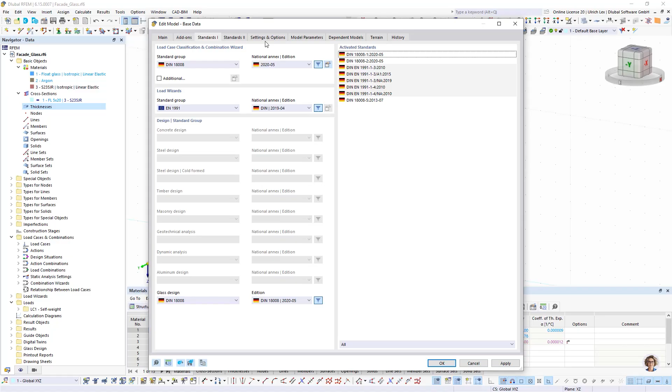So on this point, we can switch to RFEM and start with some modeling. First, I want to take a look at the base data. For today's webinar, I have activated the add-ons construction stage analysis and glass design. As standard, I've chosen DIN 18008, and as a last part, I made some small changes — when you work with a small radius, it could be necessary to modify your tolerances a little bit. I changed it from 0.5 millimeters to 0.1 millimeter. That is all I changed, so I can continue with OK.

Let us start with some modeling. For the basic structure, I want to create a plane surface with dimensions of 0.9 meters for the width and 1.8 meters for the height. For this, I first create a new thickness, and for the new thickness I can choose my thickness type: glass composition.

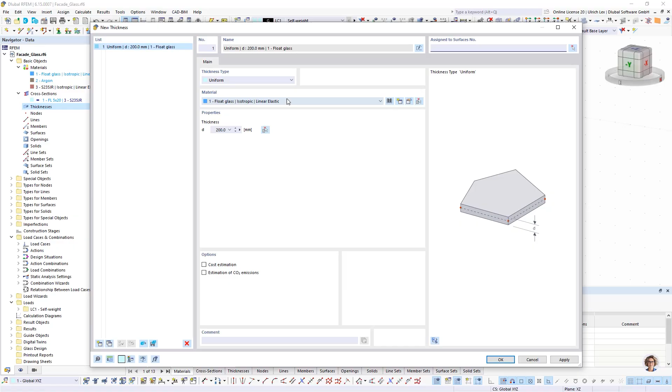Here I can easily define my different layers. I want to use a float glass with a thickness of 4 millimeters, then an air gap with a thickness of 16 millimeters, and as a second part, a float glass with 4 millimeters. This should be today my composition for an insulating glass.

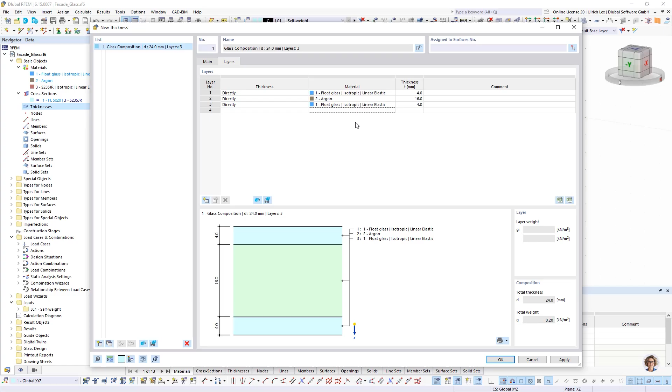But it would be possible to create a different one, just as you want — you can also create your own compositions. You can save your compositions here as a template, or read in templates directly with a composition you created before. Here, only laminated glass or a triple insulated glass would also be possible.

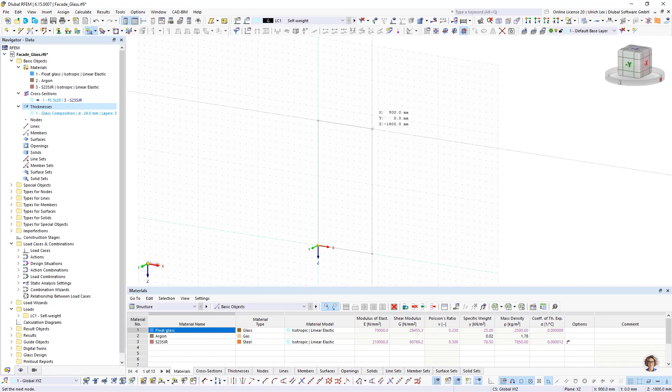Once you've created your composition, we can continue with OK. As a next step, we can create our surface. We use our glass composition as the thickness, continue with OK, and create our surface at 1.8 by 0.9 meters. So now we have created the surface.

At the bottom part, I want to divide my lines by distance, maybe starting at 100 millimeters. I don't want to divide it directly — today I want to use the node on line option, where the line is not divided.

Okay, and a second time with this I have the possibility to assign here nodal supports, maybe for the self weight.

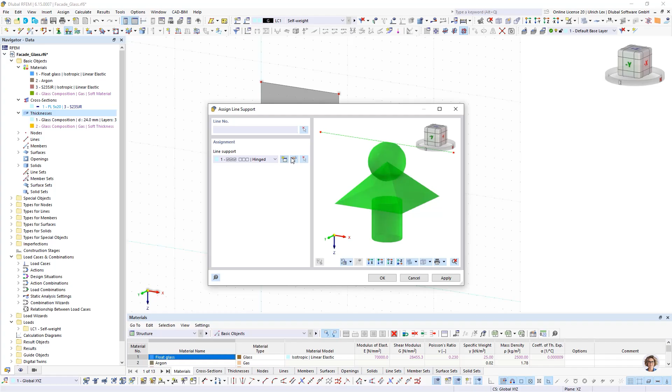As a next step, I want to take a look at the supports. Here I can use maybe line supports, create here a new line support, and say it's in global Y direction supported.

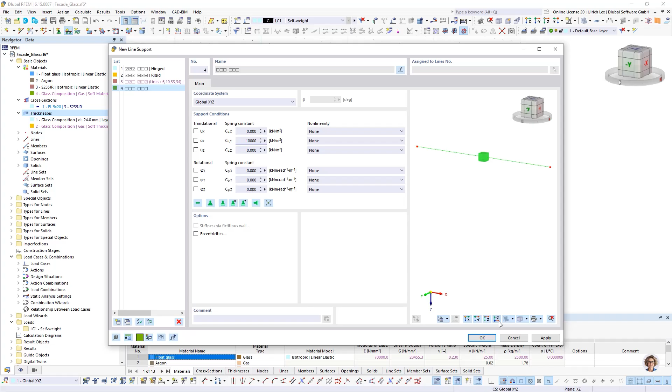Here I can also use a spring constant. It's maybe helpful for the glass, for the peak stresses in the glass. I use now a high spring constant and want to support my lines outside.

And for the self weight, I create nodal supports. One which is supported in X and Z direction, and the other which is only supported in Z direction.

So when we have done the settings, then we can go to the glass design, and here to the glass composition model. This glass composition model is created automatically. It's now red marked because the lines are not so oriented how it is needed for the glass model. That's why I open with double click.

Here I want to choose a solid model because of the insulating glass. It's only possible the solid model. I have here my layers, what I have assigned. I have here my reference plane where it is created. Here I can define my supports where they are located directly.

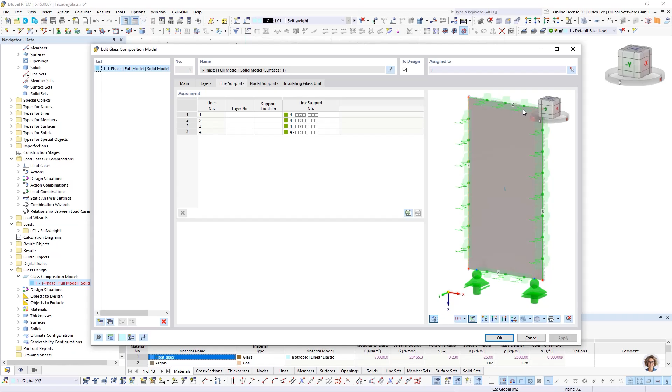Maybe here I can choose on layer 1 and 3, and in the middle 1 and 3, in the middle 1 and 3, and 1 and 3 in the middle. What does this mean? This means I have here my insulated glass structure, and the supports are created on this place or this place.

When I say it's only on layer 1, then only one side is supported, and the same is when I say it's on the top, then on this location it's created.

The same I want to do for the nodal supports. Here I support each glass surface and the middle.

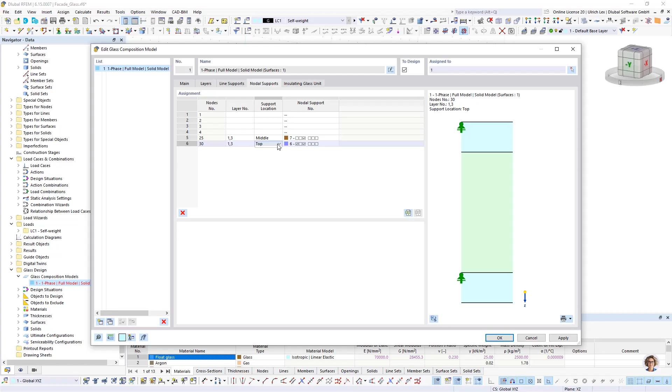For the insulating glass, I have only the setting for the spacer. Today I want to activate a user-defined spacer. Here I have to create a thickness for the side wall. I create a new thickness. I copy this glass composition, a new thickness, and use here maybe

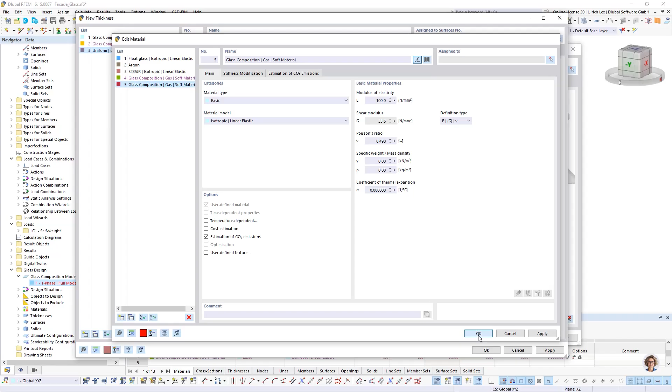a small e-module with a small shear module, and the thickness maybe 5 millimeters, and can then continue with apply.

Here I get my message that some lines are not oriented in the direction where I need it. That's why I can set the required rotation and continue with OK. Now it's not anymore red marked because my lines of the system are rotated.

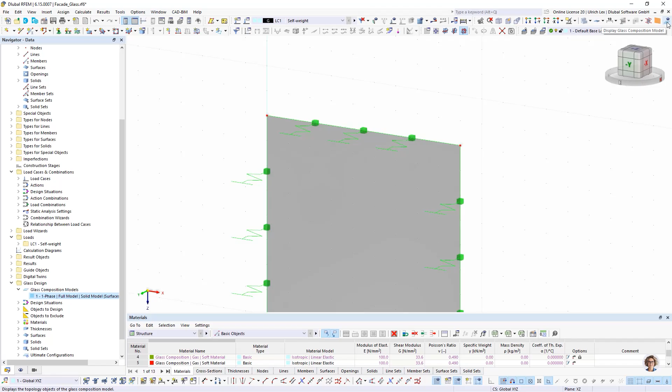So what is happening in the background? Solid sets, I do not need to see it. What is happening in the background? We can switch on the glass composition model, and here we see that my insulating composition is created.

I have on the one side my first glass thickness. It's created with 2 solids. I have my space, my air area, and on the second side my glass panel.

The supports are created also in the middle as we defined it, and downside we have here our nodal supports. So here's okay.

And now we are ready with our basic construction, what we have to define.

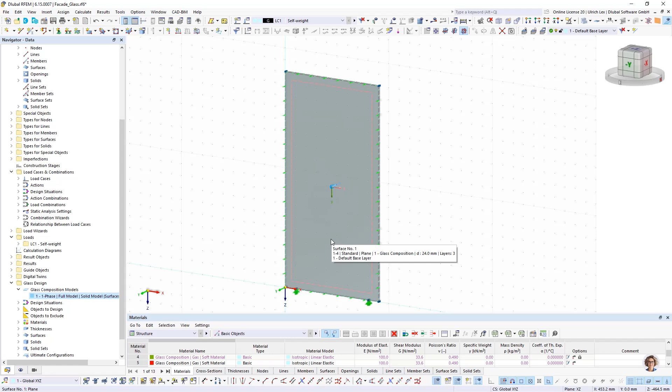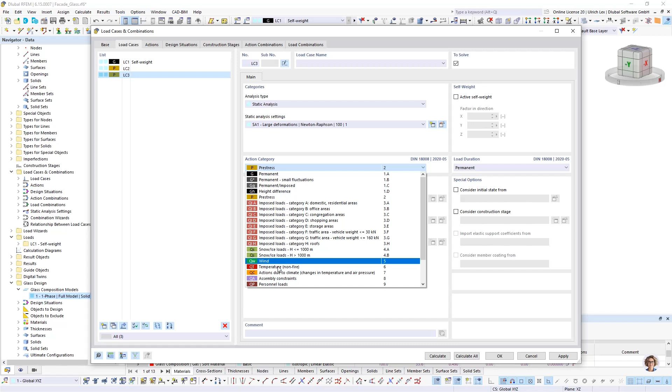At the next step, we can create the load cases. For today's example, I want to create 2 more load cases. So first one, I want to say maybe it's pre-stress, and the second one, I want to have a wind load. The self-weight I want not to consider today, so it's not needed.

For the pre-stress, I want to assign here a load where I can create this bending process. But for this, more with the next steps. Okay.

For the wind load, I can here create a new load, set as a surface load, maybe 0.7. I want to have it locally and want to use maybe this surface number 18.

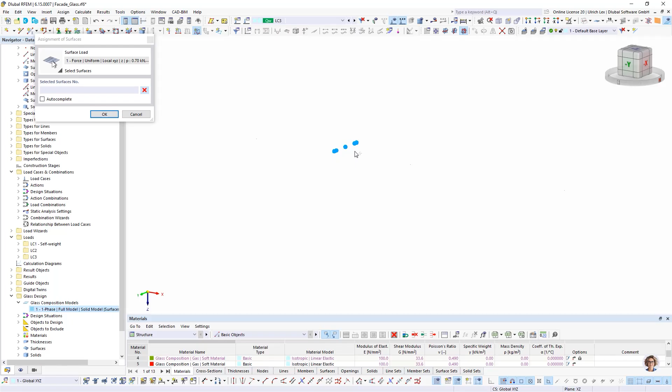It's not. Here are created 2 surfaces. The one surface is the thing what is deactivated for calculation, and number 18 is a part of my solid. Okay, and this I want to define it with minus.

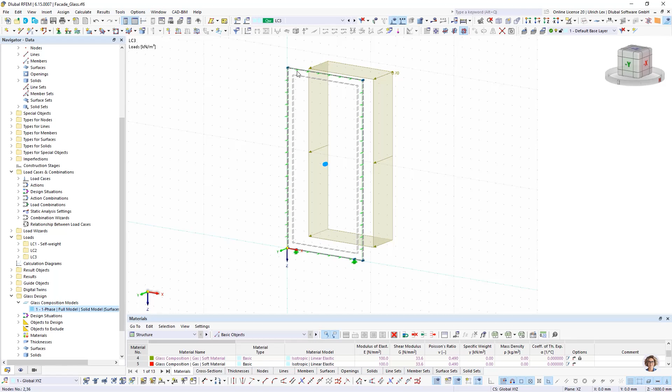Okay, now we can go forward to the next step. For the next step, I want to create some things for the bending. This bending, or this bended deformation, I could create in some different ways. The first way I could imagine is to define any load.

I can define any parabolic load and have line supports with a spring constant, and in this way I could deform it. The other way is I can use

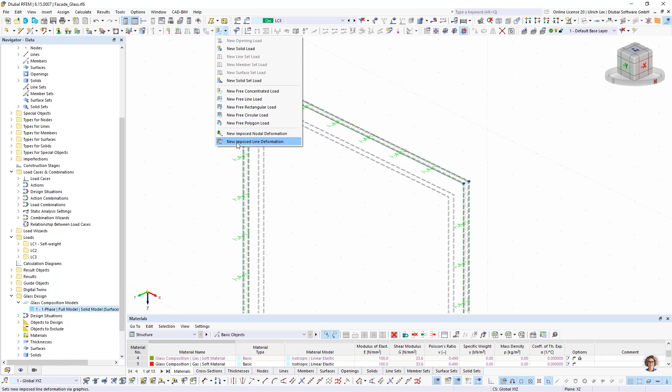imposed deformations for nodes or lines. The disadvantage for lines is I can only define a value at the beginning and end of the line, and in between it would be linear. So it's not so good for curved bending. That's why I want to use today nodal supports, nodal deformations.

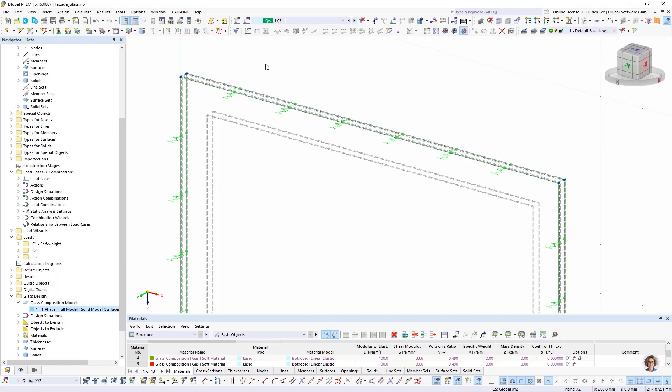These nodal deformations I could define directly at the glass panel, but this could be the reason for some peak stresses. That's why I create now a helper construction only to bring up my imposed nodal deformations. So this I want to do

by copying the line. I create a copy, maybe in Y direction, 5 millimeters. Okay, and the same downside.

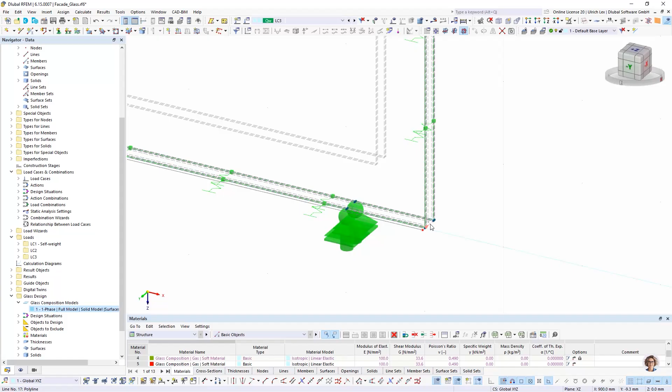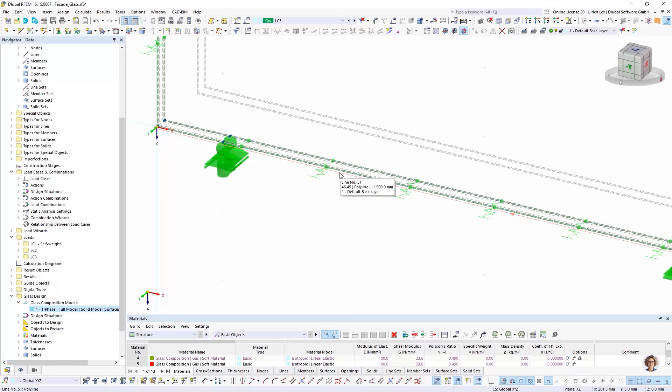This line, the deformation at the beginning should be 0, and the deformation at the end should be around 12 millimeters. That's why I can start here with my nodal imposed deformations, and I can divide by distance from the end, 100.

Okay, so it's only starting from here, and the same here. Divide line distance, 100. Okay, and I do not need this part.

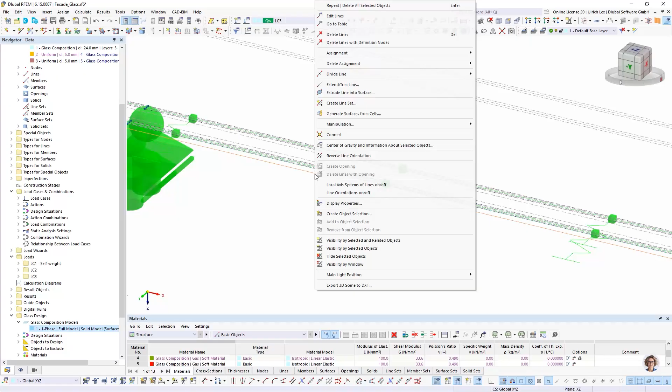So these lines, I want to assign via edit line a member, a member with a cross section. It doesn't matter, I choose now a steel cross section with a dimension of 5 to 20 millimeters, but it doesn't matter. It's only to bring the load to the glass panel, so the cross section used doesn't matter.

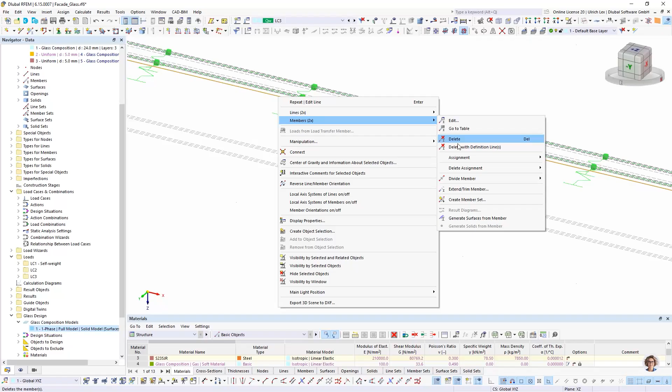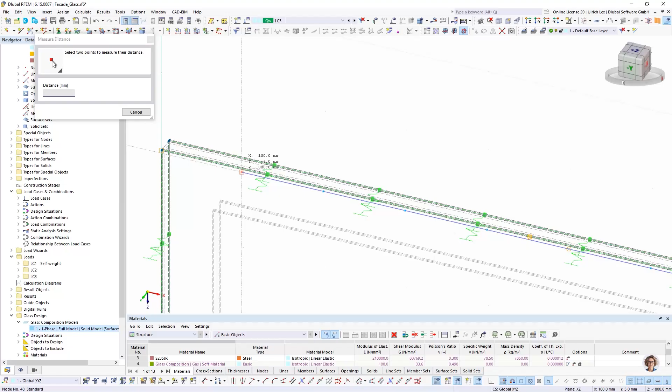And I want to divide this member into seven parts. I choose here a dimension delta of 10 millimeters. And these points are now the points where I want to assign my imposed nodal deformations.

So when I have created the member, I had to assign some supports. At the beginning of the member, I want to support it in Z, X, and Y direction. For the X direction, a small spring constant, for Y direction it's okay, and for Z direction also a small spring constant.

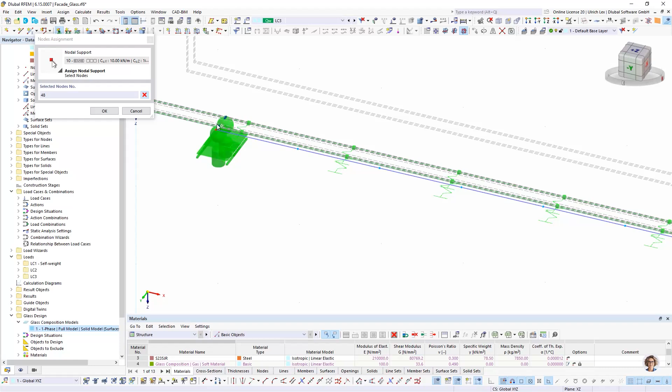And here, and here, okay. So at the end, I have a small spring constant and fixed in Y direction at the end.

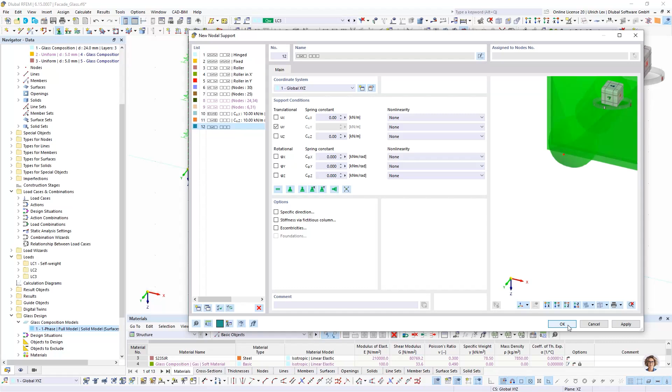And in between, I only need a support in Y direction, because otherwise it is not possible to assign an imposed nodal deformation. And here, assign all these nodes.

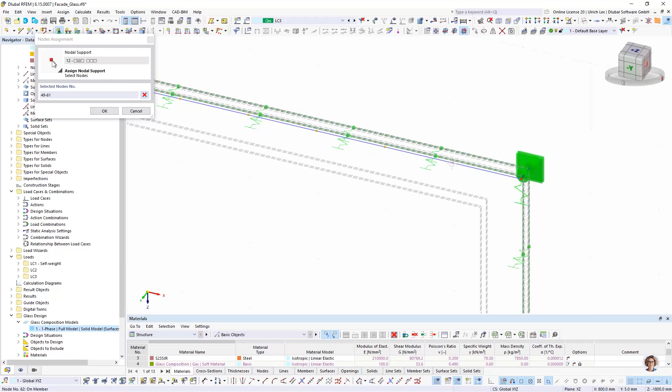Yeah. Okay. Okay. Okay.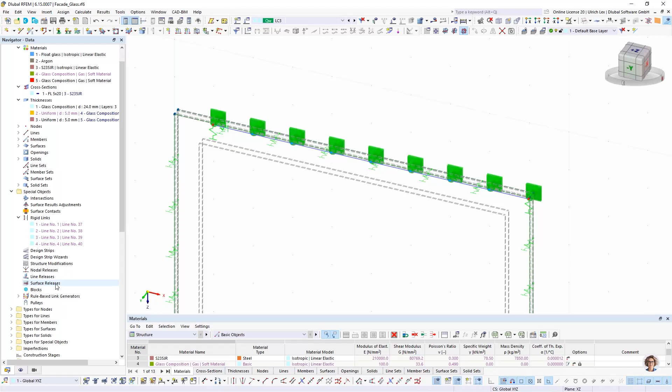So as a next step, we have now created the member, the supports. Now I would need a connection from my member to the glass panel. This would be possible with a rigid link, maybe. There are 4 rigid links automatically created. This was done by the solid glass composition model. Here I can create a new one.

It's from line to line. I choose here again my line 38, and as a second line, this one. I create here a new line hinge because it should not be a really rigid link. So I create a new line hinge where I set a small spring constant in X direction. I need

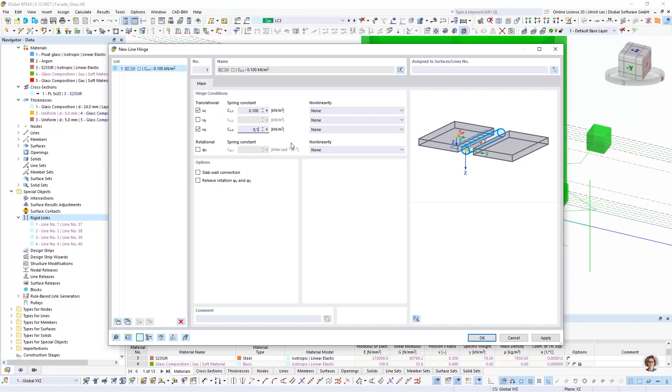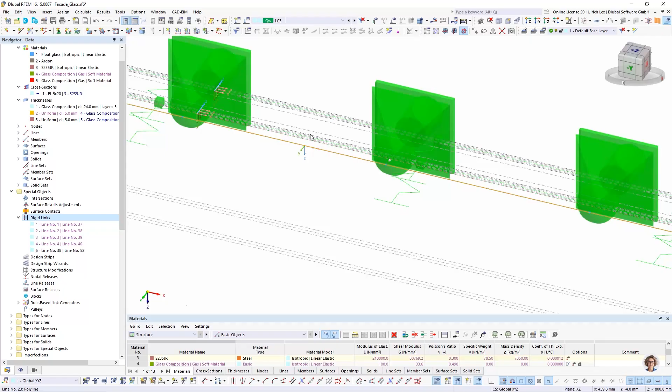a connection in Y direction, and I set a small spring constant in Z direction. Okay, here, when we look at the lines, we need a connection in Y direction, and in X and Z we set a small spring constant. The same I have to do

downside. I choose here number 40 and here 51, and I assign this line hinge.

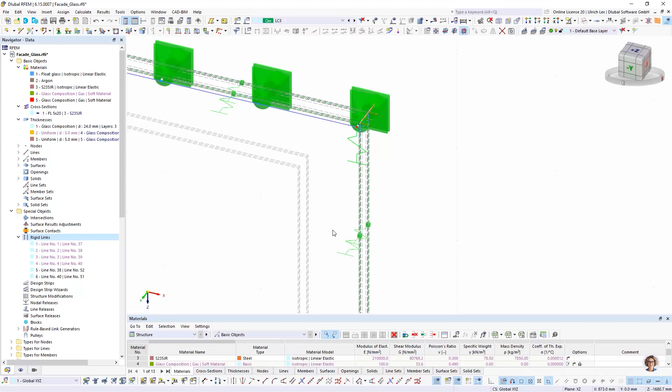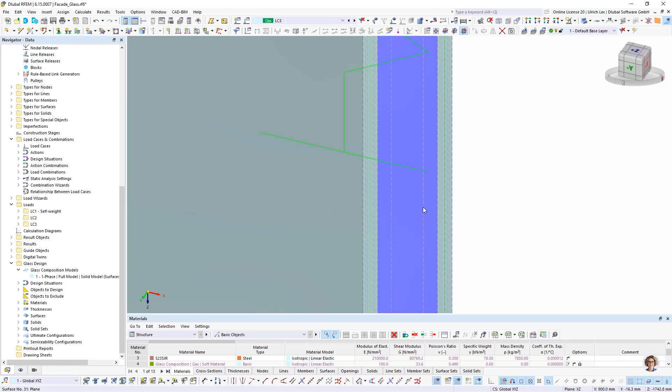So now we are ready with the modeling of the system. Here I created the glass composition model. I deactivated the automatic spacer and created a user-defined spacer. When there is an automatically created spacer, then a line hinge is created between this surface and the glass panel. It's up to the user, but it is also possible to create it afterwards.

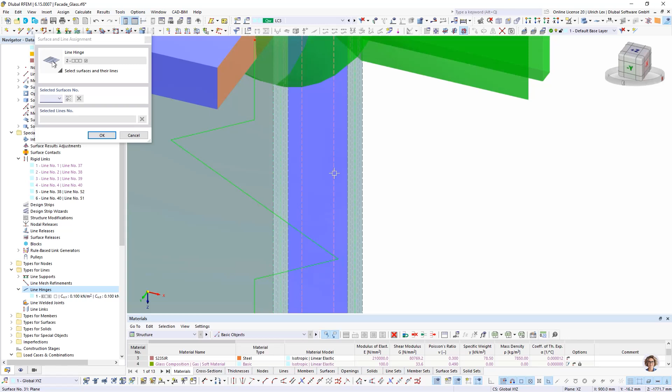So you can easily add a line hinge too. When you use types of lines, line hinge, and create a new line hinge, we can say ux is free. Then we can choose the lines of the glass composition model and create some line hinges. Please be careful, because when you change something at the glass composition model, then maybe this connection to these lines is lost, so you have to check it afterwards and maybe assign it a second time.

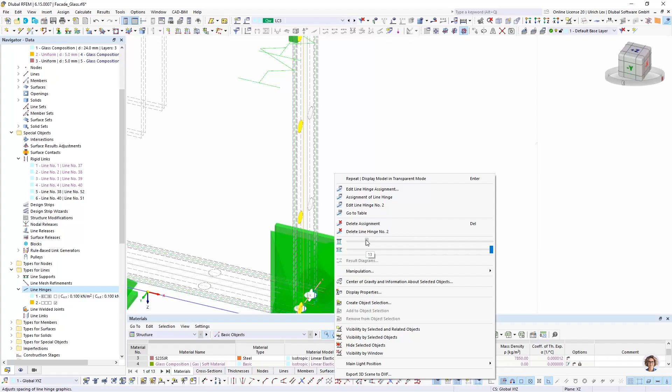I want to show only that it is possible to modify also this glass composition model.

Then we can continue with the loading. For the loading, we created already this load case 2. And now I want to define here some imposed nodal deformations. The shape of the bending do we have here now to create with this imposed nodal deformations.

Here you have different options. I have now a list where I know, in addition to my radius - the radius is about 34 or 33 meters - I have created a list which deformation each node does have. It could also be used here a formula, or a user-defined formula to create your deformations. So I want to set it today manually.

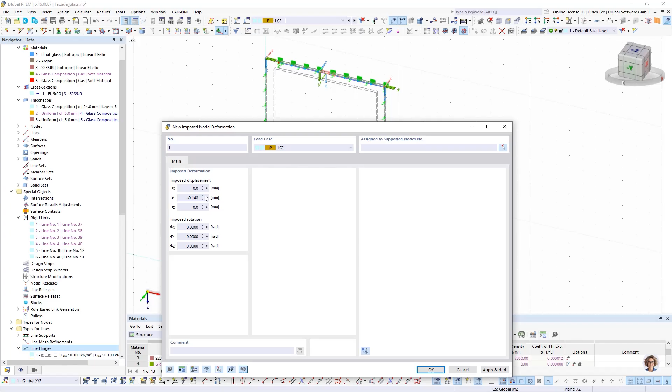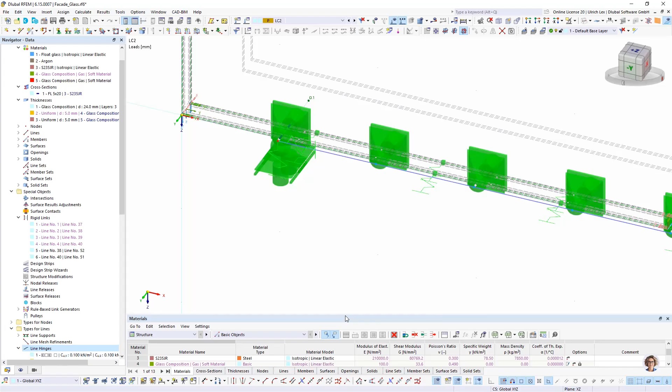Used for the first one, 0.148 millimeters, and assign it to these both nodes. Here I can show it, on the loads, imposed nodal deformations. Here we can create the next one.

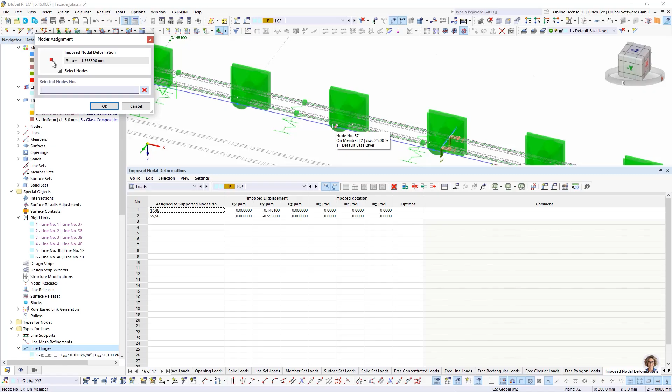So the next one is 0.5926 millimeters. Here's the second one. Apply. The next one is 1.3333 here and here.

Then we have 2.3703. Then we have 3.7036. The next, 5.3332.

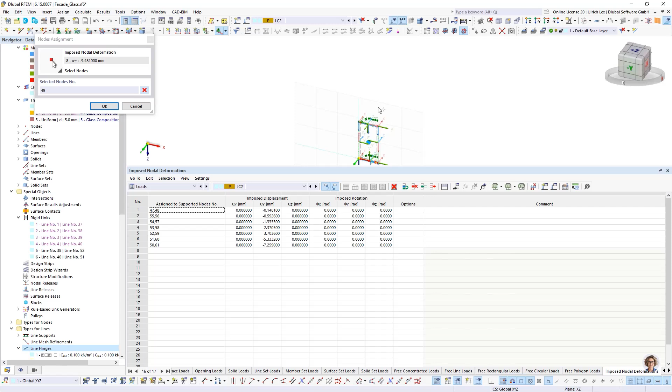Then we have 7.259. 9.481. And as a last one, we have 11.9993.

Okay, so now we created this imposed displacement. For this case, as I said, I defined only in the x direction of the rigid links a small spring constant.

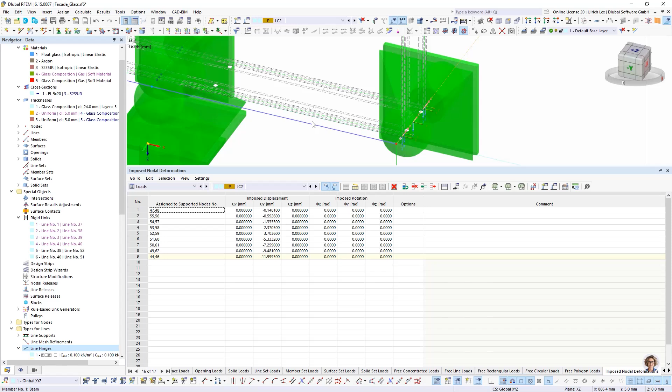When if you would assign this displacement directly to the glass surface, then it would be needed to consider also the deformation in x direction, because otherwise you would get some internal forces that you don't want, or high peak stresses at this point of acting loading. Therefore, this system is in my eyes a little bit better, where the x direction is nearly free.

Okay. Now we have created our displacement, and at the next step we can continue with the stages, with the different stages, with this bending process.

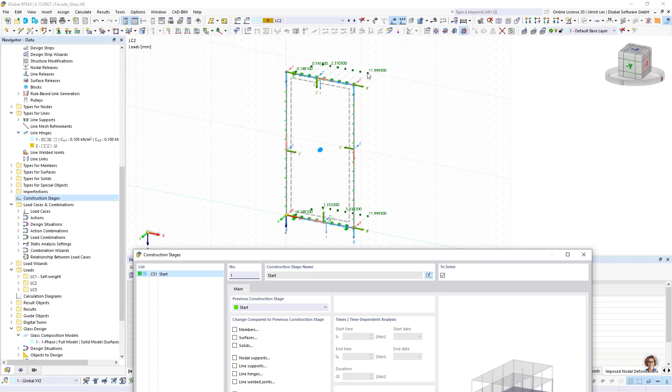Therefore, I create here a new construction stage. At this construction stage, I have to define everything that is acting at the stage. For our case, I would define 3 stages. At the first stage, I want to bend the system. At the second stage, I want to activate the line supports - this means the fixing on the facade.

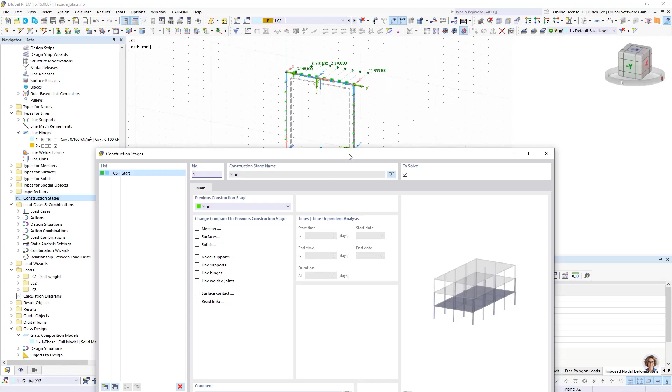And in the last stage, I want to deactivate my helper systems and this nodal displacement, to then define the wind load on stage 3. Okay, what we have to do?

We have to activate the members. At the members, there are acting members 1 and 2. So there are acting the surfaces, there are acting solids, there are acting some nodal supports and also one line support. There are acting the line hinges and there are acting rigid links. I check it on, I get here the tabs, and now I have to

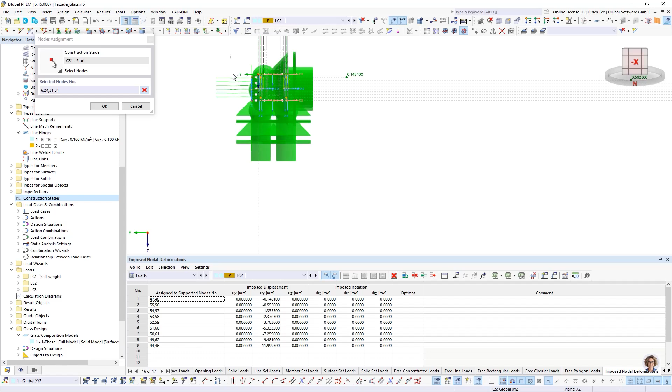Define which objects are acting. For the surfaces, I would say all surfaces acting. The same is for solids. For the nodal supports, here I have to choose: on one side my glass fixing supports should be acting, or the nodal supports on the glass pane, and I would say all other nodal supports should act too.

Okay, as a line support, the line support should be acting only on this one on the left side, because here the deformation should be 0, and only on the right side should it be bended with this 12 millimeters.

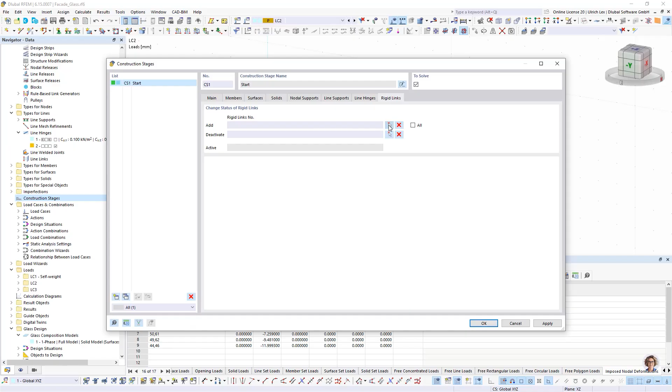Okay. For the line hinges, all line hinges are acting, and for rigid links, there are this both acting - this one and this one. Okay.

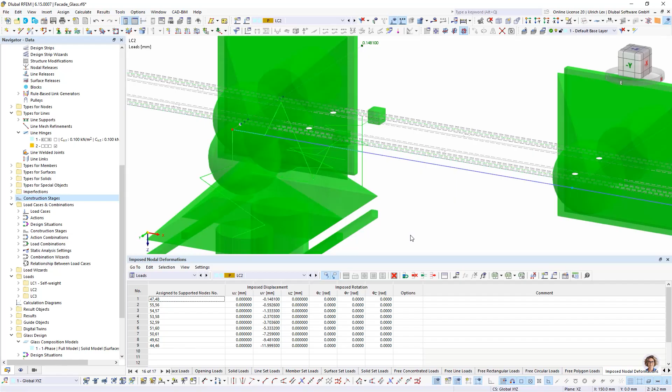Okay, when we have defined this, then we can take a look at this construction stage. When we activate it here, then we see exactly what is acting. I see that my supports are acting, and I see that my members and the glass surface are activated.

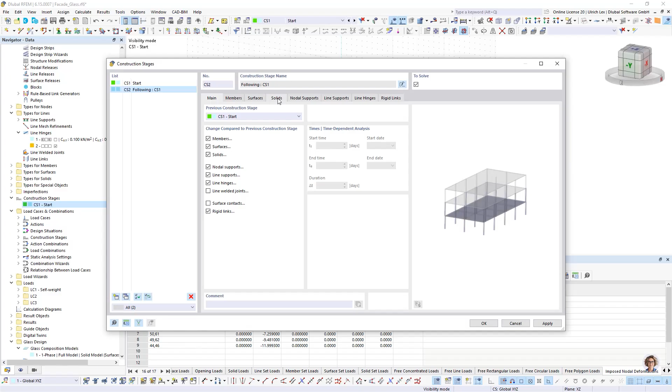So as a next step, I can define also the other stages. I want to create a new stage. This new stage is following the first one. At the second stage, everything is acting as it was in stage 1. And for the line supports, there are activated the other line supports too.

Okay, and for the last stage, I created a new one again. Here should be the members deactivated.

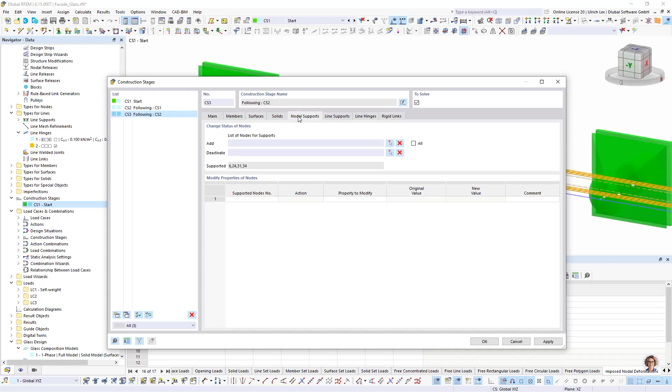And when the members are deactivated, then also the nodal supports which are connected to the members do not act too. So the other things are the same as in stage 2.

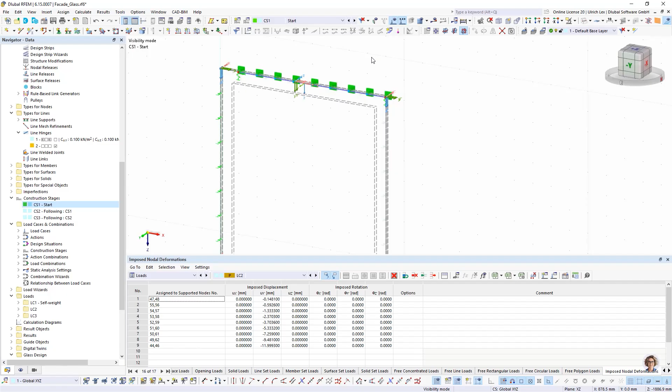We can continue here with OK, and we can look at the system. So the first stage we checked already. At the second stage, the fixing from the glass panel is activated, and as a last step the helper construction is deactivated.

So when we already did this, then we can continue with the settings for the FE mesh. Here I can look at the mesh settings.

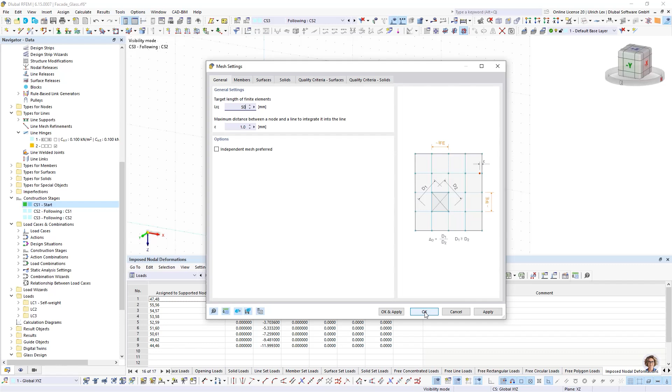For the glass, it is better to use a finer mesh. So I choose now 50 millimeters and can continue with OK.

As a next step, we can take a look at the loadings. I open my load case and combinations dialog. Here I have also the construction stage. On this place, we have to define which load is acting for which stage.

On stage 1, it should only act the load case 2, my nodal deformations. As I said, I do not want to take a look at the self-weight, so I do not activate it today. Of course, for a complete design, you would have to activate it too.

On my second stage, it should again act my load case 2. And in stage 3, there should be acting the wind load, and my deformation load should be inactive.

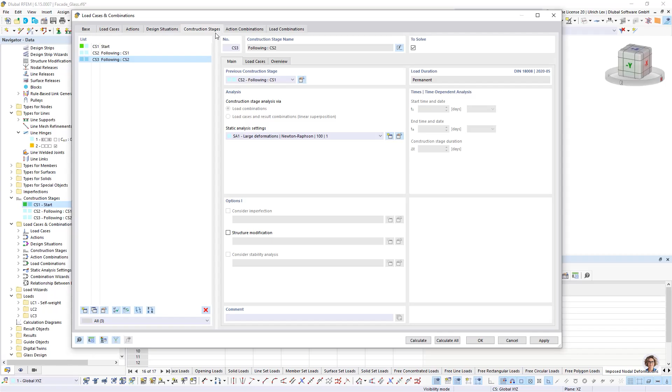So for the construction stage, is it necessary or is it important to take a look at the static analyze settings? Because it's needed that the analyze settings for the load cases and/or load combinations and the different stages have to be the same. So in this case, we have large deformation analyze, and the same is used for the load cases, so it is okay.

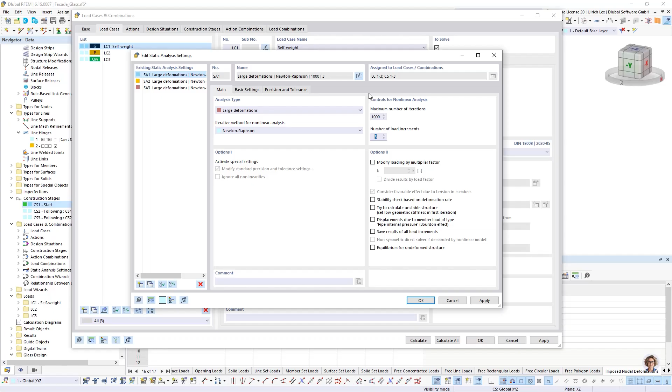Here maybe I can change the iterations and increase the number of load increments. It is sensible for insulating glass design.

As a next step, I can look at the design situations. I do not want to take a look at the SLS, so I deactivate it. I only want to take a look at the ULS. Here I also can look at the combination wizard.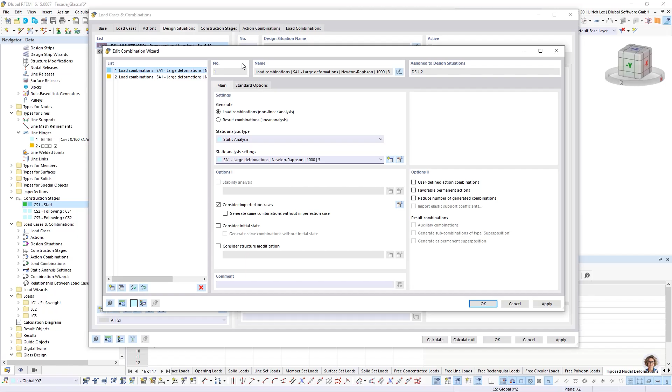I activate my static analyze setting, and here I can consider my initial state. That means I can consider my different stages. When I activate the check, I get a new tab, and here I can consider the different stages.

Today I want to consider stage 1 and stage 3. When I do this, then the load combinations are created for stage 1 and stage 3.

When I continue with OK and take a look at it, then I see I have created a combination with stage 1, where stage 1 is considered, and automatically a combination is created where stage 3 is considered. Stage 3 is here considered with this item, and here stresses and deformations from stage 2 are carried over to stage 3.

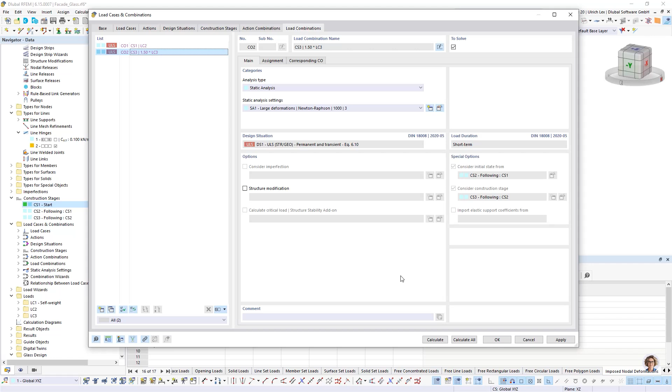So when we have done the settings, then we can continue with the calculation, and we can try to compute the first stage.

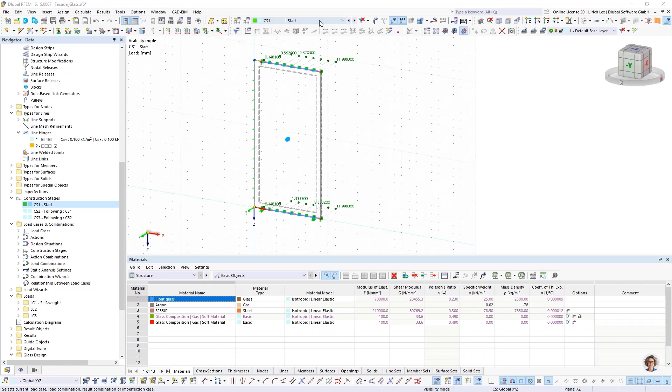So we can easily choose stage 1 and try to compute it. Here the FE mesh is created, and after that the imposed deformations are computed.

We see here the 3 different load steps, and my deformation is here about 12 millimeters. So everything seems to be okay.

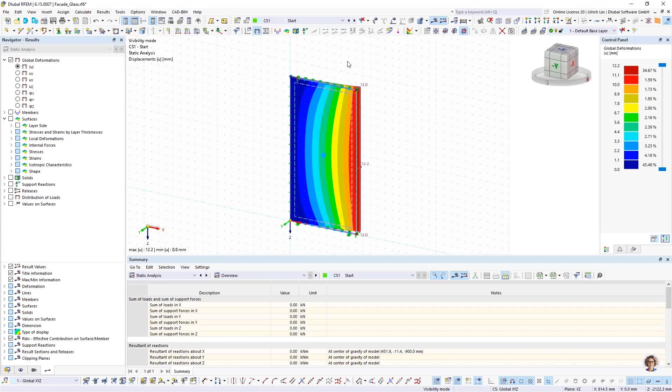And we can continue with the next one. Before I compute the next steps, we can look at the glass design. I forgot before, when you create your main surface, your basic surface, you can switch on and off your glass composition model.

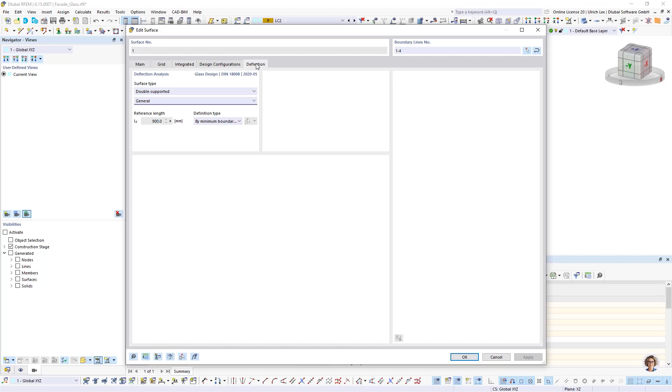So you can look at this surface. Here you have the settings for the glass design. You have the design configurations according to the standard, and the deflections.

It's okay in our case now. So we can here continue with OK.

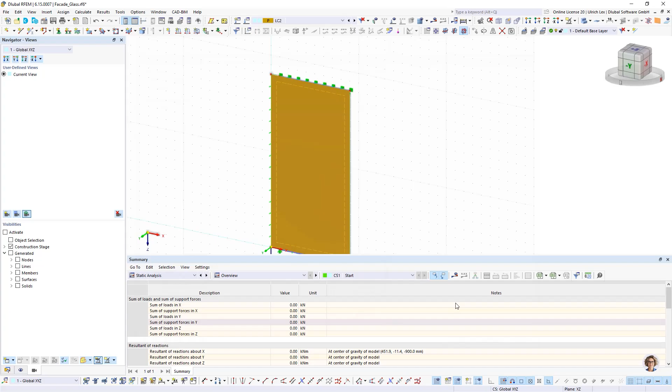Now we can continue with calculate all, or with the glass design. With calculate all, we have to be careful, because then all load cases are computed too, and maybe load case 2 or load case 3 separately computed are not able, because of the missing different stages. So in the different stages, the different design supports are activated and not, and that's why it is better to compute the glass calculation. Then only the things are computed that are needed for the glass design.

So here we see the calculation process of the internal forces, and after that the glass design is done, and then we can take a look at the results.

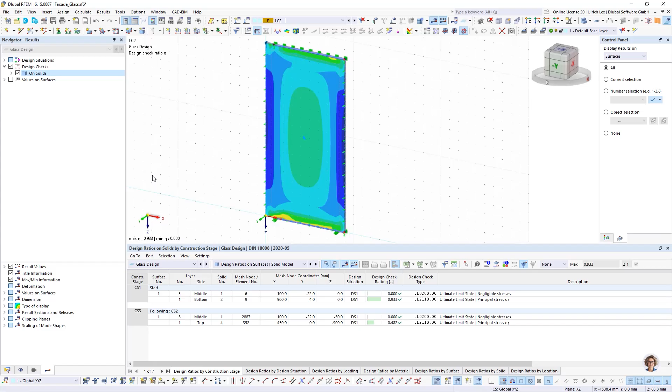Okay, now I get the results for the 2 different stages, for stage 1 and for stage 3. As usual, we have here all the results, on the one hand for the glass design, and on the other hand for the static analysis results.

These are maybe the deformations or the stresses, in this case the solid stresses, and the sigma 1 stresses are necessary. Here you can compare it between the different stages and can do the analysis.

When we take a look at the glass design, we see that on stage 1 we have a ratio of 93% and for stage 3, 48%. This seems confusing at first because we would think that stage 3 must have a bigger ratio, but this has an easy solution.

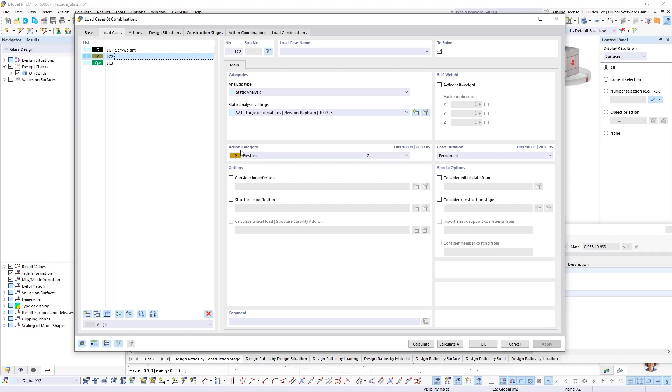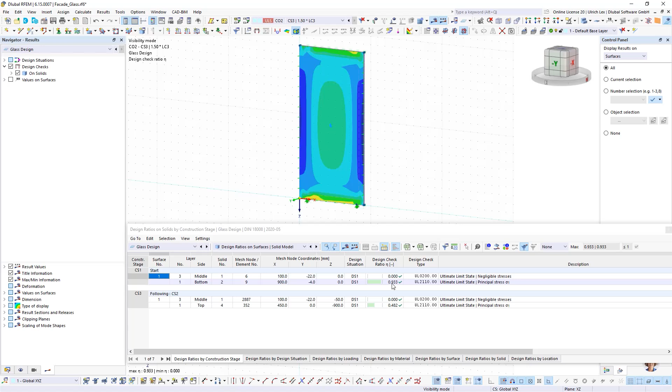It's connected to the design standard. For the design standard, there are defined load durations for the load cases. The pre-stress or the imposed deformation is now considered as a permanent load situation, and our wind load is considered as a short-term load.

This is the reason why, when we double click, we see the factor 0.25 in the allowed stress for stage 1, and for stage 3 we have the factor 0.7 for the short-term loading, and that's why we have a different design ratio. This is an effect of the standard.

This would need to be taken a closer look at by the engineer, because I'm not sure how such imposed deformation has to be considered. It is not possible to mix both.

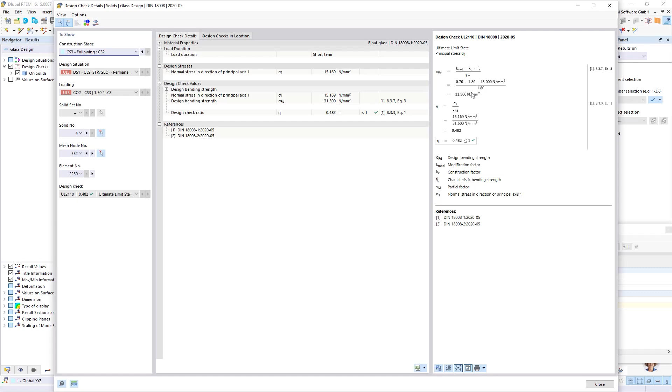Here in stage 3 are the imposed loads. Here only the factor 0.7 is considered for the ratio. It's not possible to mix the stresses from stage 1 with the factor 0.25 and sum them with a factor 0.7 for the stresses from stage 3. This is not possible, but this is solvable, I think, by the engineer.

Okay, these results are, as usual, possible to document in the printout report, and this is the way how we can design and consider these cold formed systems with RFEM and the add-on construction stage analysis and the glass design add-on.